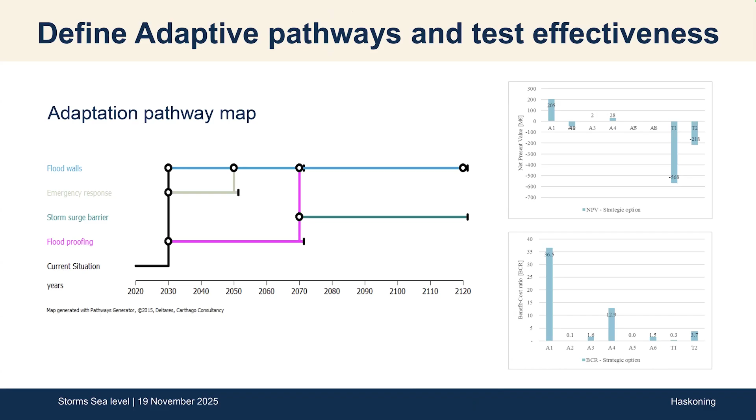On the next slide, you can see we really look into different economic parameters, because they can have quite an effect on when you should invest, and also to what level you should invest. So from a policy point of view, we're thinking: should we build to a 100-year, 1,000-year, or 10,000-year protection level, really finding out what is most economical and sensible for Singapore. But also seeing if you tune the parameters, for instance the discount rate, or different sea level rise projections, or inflation rates, it can actually change your way of looking at this.

And it can also change how you consider building. I could build something today—for instance a dike—but only for 1 meter of sea level rise, and then imagine that if 2 meters of sea level rise is to occur, only in 50 or 100 years' time, I start to build my next 1 meter of defense.

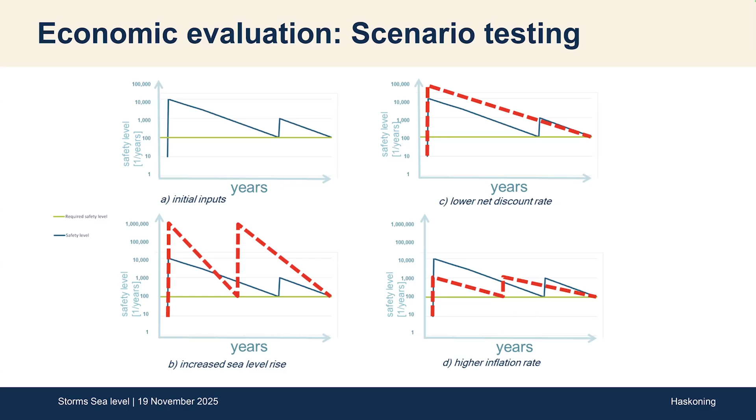So all these kinds of assessments we've actually been doing to really show the government what is the best way forward. So now moving on to some of the project highlights. This is from the newspaper, from the Straits Times, where you can see some schematics of what's going on—I will go into more detail later. So I'll tell you a bit about the Greater Southern Waterfront, which is currently a port area, the Long Island, and the Southwest Coast, what Stas mentioned on Tuas and the Jurong Port area.

So here you can also see a bit on the public engagement—this was in the newspaper. This is actually our conceptual design, where you can see barriers, and you can see flood walls, and quite nice artist impressions for the people to appreciate what we are doing.

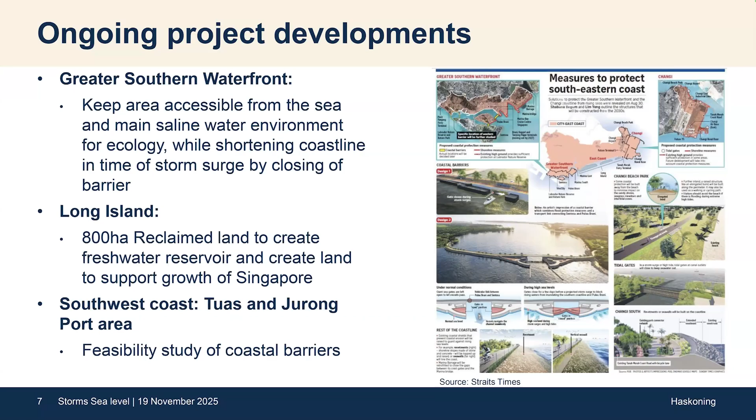So on the next slide, here is that barrier. It's like closing off, or it could close off, the water body behind it. As you can imagine, it should only close when a storm is actually coming. For the rest of the time, you have open access to sea for vessels to maneuver.

But what you can also see is there's a bridge on top. There's a very high desire from the government to make another crossing from one island to the other, for people to really use both sides of the islands.

So in the end, what did we do? We really led the design, the conceptual design of this barrage or barrier scheme, and looked into what type of barrier you would want, what types of gates are applicable for such a design. We started off, for instance, with vertical lift gates, and then the government said these are so ugly—why did you even bring this forward? So now you can see a very gentle design that fits in the environment.

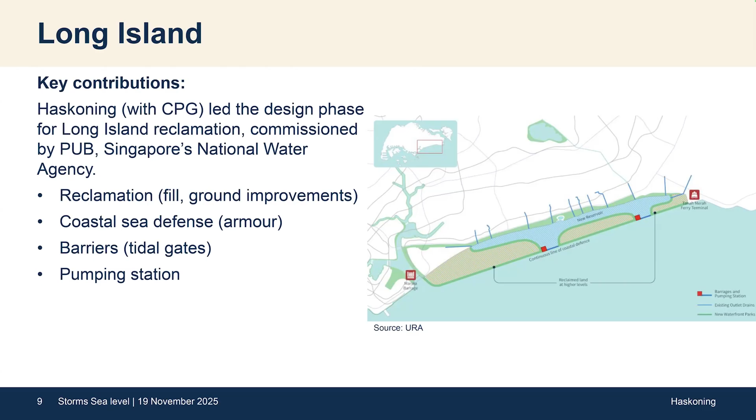So what is special about this? Again, it's a mega project. The conceptual design was done by us, but now the construction planning is already starting, and over the next two decades this is going to be built. We were involved here also in the reclamations, the coastal defense, barriers, and pumping station.

So here, next one, you can see an artist impression of how this should look. Again, to show the public it will not become as ugly as it looks just as a plan view—they really try to create new amenities for the public where they can go in their free time, and really try to persuade everyone with that.

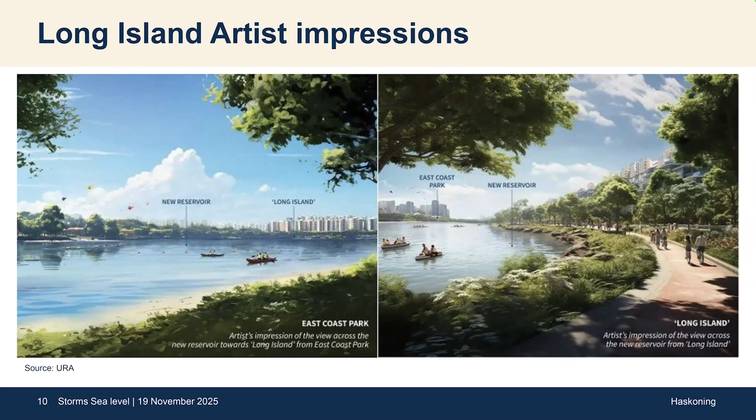Also, on the next slide, you can imagine there is a sea-facing coastal defense. There are different ways to design this. So we are also showing to the government that if you would just build a pure coastal defense with armor rock, a very bold sea defense, then you might miss out the opportunity to create new habitats. So we're showing references of projects in the Netherlands, where Haskoning also designed, what if you would create habitats in front of such a coastal defense, then you can integrate a coastal defense with creation of habitats.

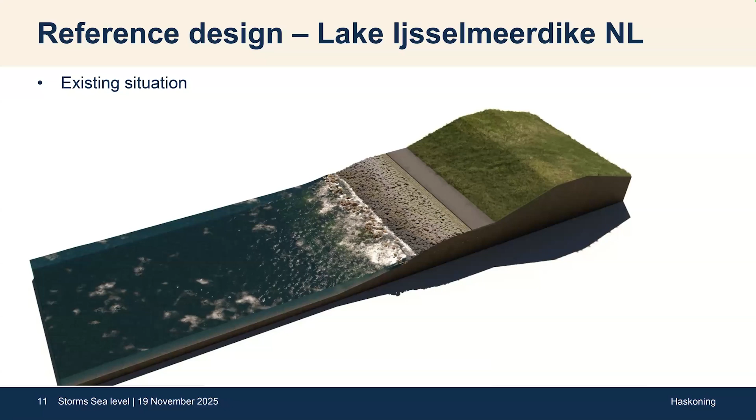So that's what you see in the next slide. Here it's the same setup, but then we built, or are planning to build, a foreshore, because the project just started in the Netherlands, where they build a kind of a perched beach on the seafront, with a beach in between, where you can have a kind of intertidal area where fish can go, and also grass and sand can be accommodated. These kind of solutions we also try to show to them.

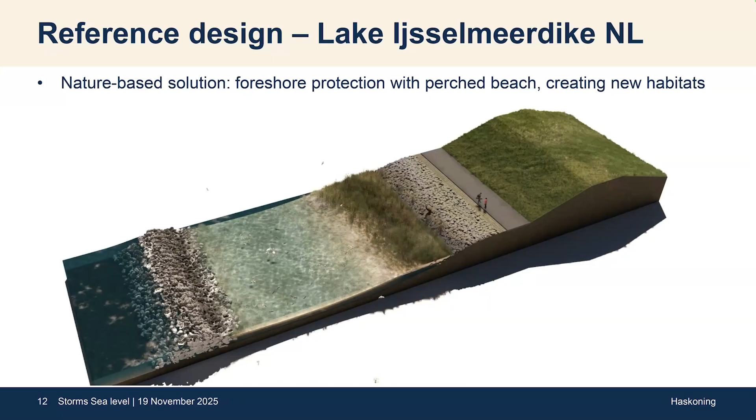On the next slide, also again something from the Netherlands. This project has just been finalized after almost 8 years or so. This was ongoing in the Netherlands, at the Afsluitdijk. It's our biggest barrier and dike, over 30 kilometers long, protecting the hinterland. But it is over 100 years old, so it needed an upgrade. So they did the upgrade in the same, present condition, and just added other features to it.

So they actually built in the existing dike a pumping station of 300 cubic meters per second. That's like over 10,000 cubic feet per second. And they built big tidal gates next to the existing ones. So all in all, that's an active structure.

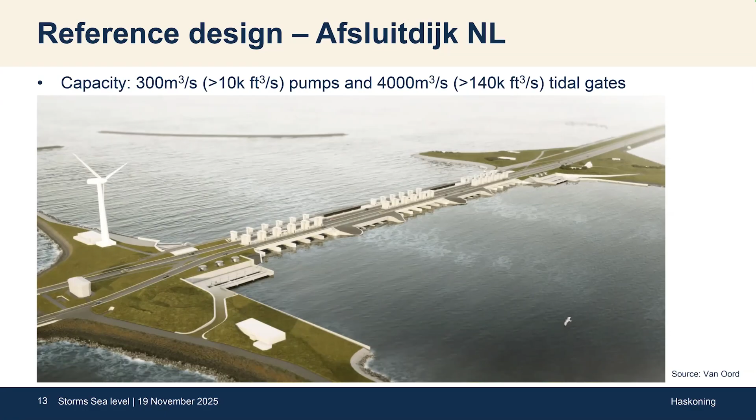So I put in the next slide some cross sections so you can also have an appreciation of the scale, where you see these big pumps, like a single pump of 50 cubic meters per second, which is pumping the water from the lakes into the sea. But you can also see, in the Netherlands we have high safety standards or flood protection standards, so here this contractor designed for 3 gates to actually have reliability.

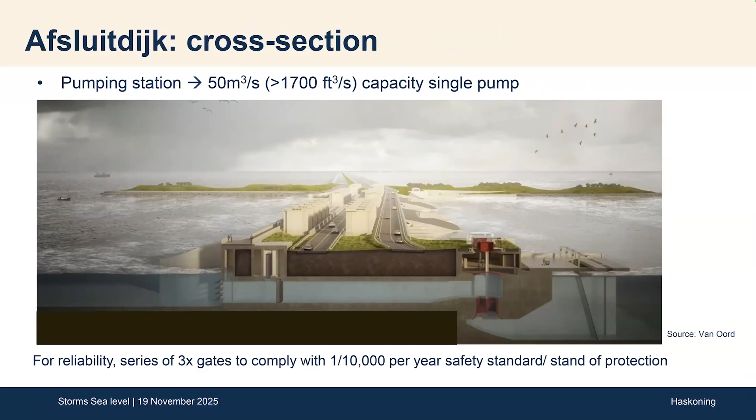So then we move forward, back again to the flood map and the last case. So it's on the southwest coast, on the bottom left corner. The island in the middle would also be flooded with sea level rise. But what you can see here is that the whole edge of the waterfront is prone to flooding. So now the project is, what are we gonna do?

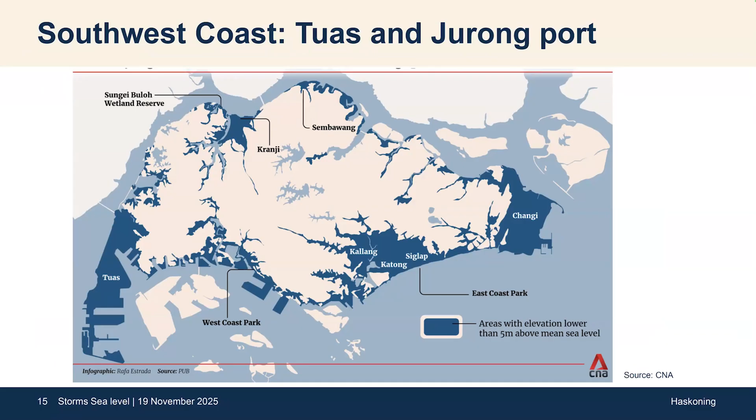The next slide will show you the ambition. Tuas was already mentioned. There are a number of ports in blue on the right: Pasir Panjang, Brani terminals, city terminals. These are all existing active ports, container terminals or similar. They are all active, but Singapore is very forward-looking, so all of these ports are actually being planned to move to the orange part, the Tuas port. So they could free up that land and build new residential, commercial, and touristic areas. This whole operation is being planned and is already put in motion.

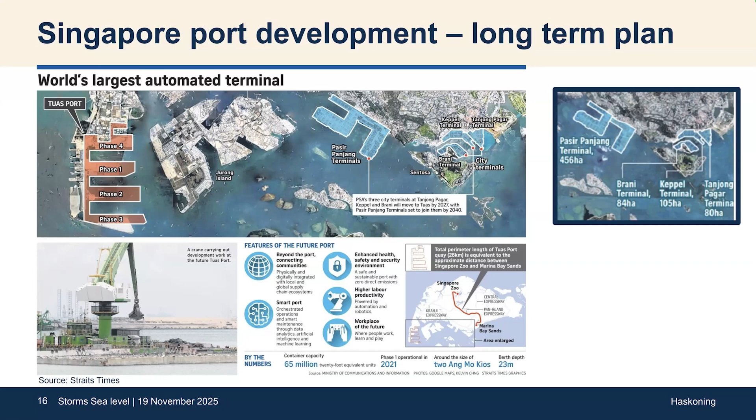But you can also see that still that island, Jurong Island, and the water edge I just showed, the Jurong part, is still in the middle of it. Looking at the next slide, they're saying, what should we do with that area? Because it's a little bit low-lying. As I said, it's prone to flooding when there is sea level rise. So should we consider defending that because of the economic importance? It's an active port, petrochemical companies are there, all the shipyards Singapore is famous for. So all of that is there.

So they asked us to study the feasibility of constructing 2 barriers or barrages in the yellow rectangle boxes, on the west and east side of these channels.

If you would do that, you would close off the channels, but you can protect the area behind it in one go by just shortening the coastline. So in this study, over the past 3 years, we assessed what would be the hydraulic behavior of such a system, and if you close off, can you still operate your ports in an efficient manner?

So also a lot of stakeholder consultation with the port has been involved. In the end, we assessed what if you would build a storm surge barrier that you could close only during storm surge seasons, maybe once every few years, or if you would build it like a lock and gate system and have it closed always, but having locks to let ships pass through.

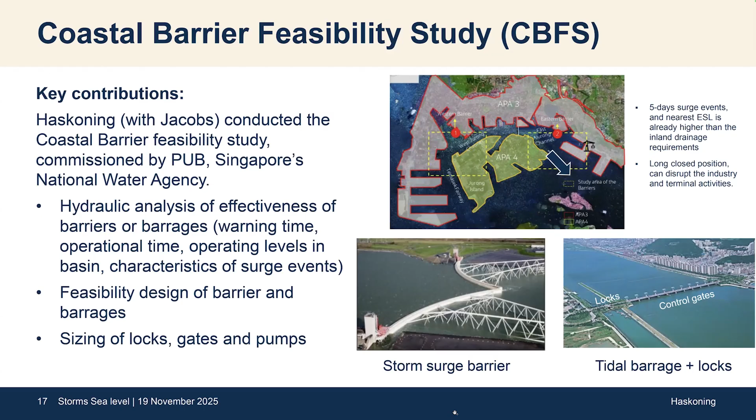Lastly, Stas mentioned the Tuas port, so I have some facts. All the city ports will move to the Tuas port. Already for the Tuas port they have a long-term view, so they will build it at a sufficiently high level that they do not need to come back in the next few decades. Parts of it are already operational, and when everything is moved from the city terminals to this port, it will handle 65 million TEU - quite an impressive amount.